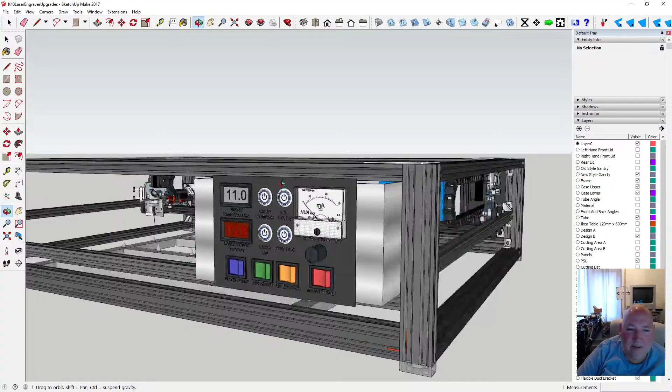What are we going to do with the something else? Yes, also went ahead and put some angle brackets here so I could move the whole thing forward to clear the wiring sticking out. So I put two angle brackets, I mounted it, and it needs to have a cover over the top or something.

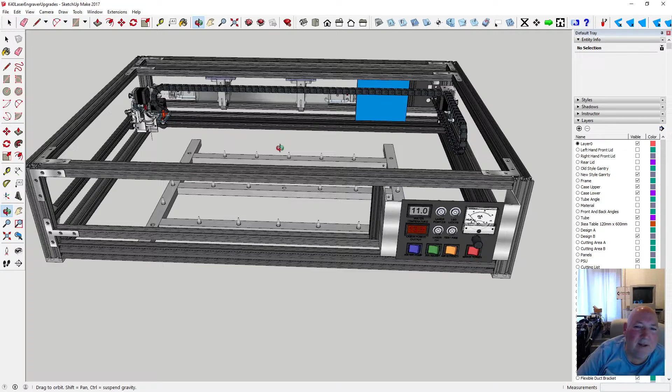Okay, sort it out. It's not like a CNC router. My CNC router, it starts limits from left front. It goes up - the bed is longer going up than it is across. But with a CNC router, it doesn't really matter where you start from. But it matters on a laser because you need to be homed, really.

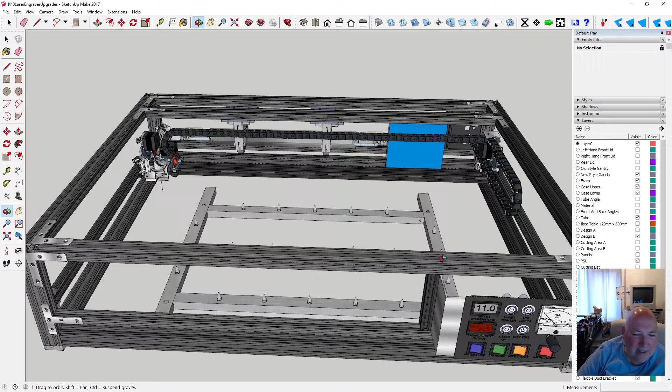You need to be homed nearest where the mirrors are closest together, because that's where you get the most accuracy. So if you want to be all the way over here, cutting a panel, just a small panel, that mirror is going to be right up here, this one's going to be right over there. Any tiny margin of error will be exaggerated over this end.

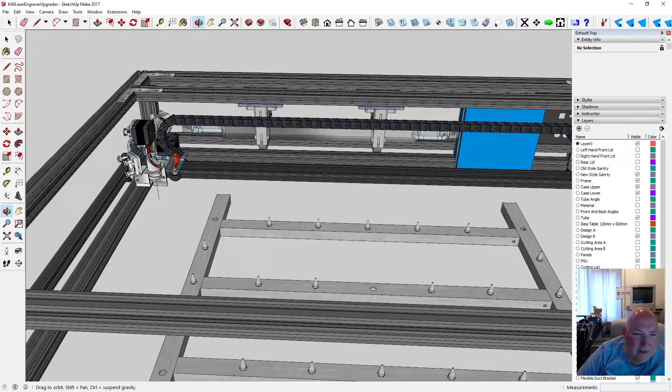So it makes sense to cut it over this end. Now the problem is, when you're on your LaserGRBL software, or LightBurn - don't know about LightBurn yet, got it working with LaserGRBL at the minute - you're wanting to cut from here, but your XY is there and it wants to move forward to go up the screen, and it wants to go to the right to go across the screen. No, it wants to go the other way, sorry, it wants to go right. Imagine this is turned around, it's almost like this is the front. So to cut it, that's your homing position, when I'm used to being homed over here, really.

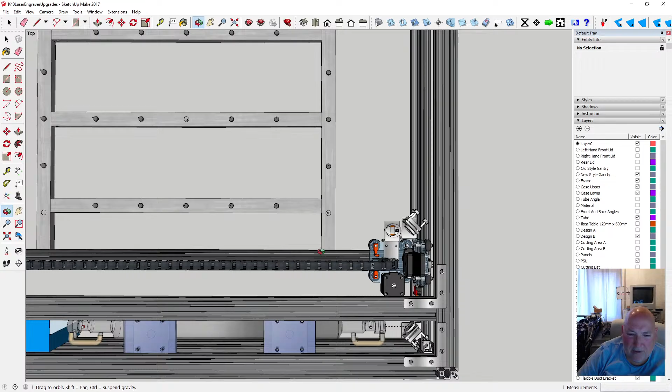But like I say, you don't want to be homed where your mirrors are spread apart, you want them close together. So if I want to cut an item that's about that big, the area I'm cutting, if I start there, it's going to go up, and then as soon as it tries to go across, it's going to hit the home limit. So you've got to first travel, you've got your machine coordinates of home, and then you've got your work material start coordinates.

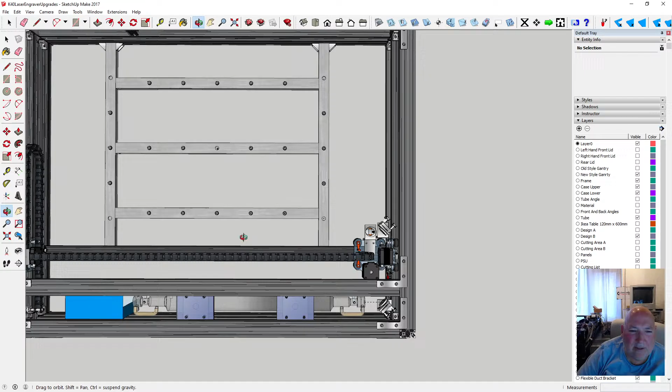So you need to offset it wherever you want. Ideally, you'd place it so the furthest most right part of your cutting area wants to be sort of down here. So you wouldn't put it over here, and you wouldn't cut it over there. You could cut it over there, depends how accurate you're going to be, but no matter how good you align it up, the further away you get, the more margin for error.

Anyway, I was having stall conditions and all sorts on the real thing here, but that's before I changed any of the settings in the GRBL settings. So I sorted it all out. I did lubricate the wheels as well, don't know if that made much of a difference, and the drag chain, lubricated it, and I've turned it round now because I was about to do some more wiring, but we can turn it back again, and run up the software, and I can show you running a piece.

The laser at the minute is not lined up. It's not going to be cutting with the laser, it's just going to be making the motion.

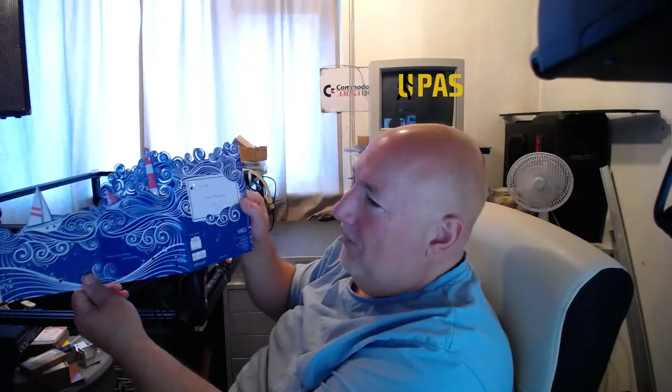Alright, oh, there you go, Father's Day card off the daughter, very nice. Marks and Spencer's. That's Father's Day today. And some of the money the daughter gave me for Father's Day has gone over to pay for my industrial chiller. I'll put that somewhere for a bit.

Right, let's get this great big thing round. Let's try and turn it round so we can see it from the front.

So we've got power, we're going to need the lead. Yeah, it's still got all sorts of stuff balancing on it, hasn't it? That's it, it's not going to fire up, so let's get a laptop on the go. I've dropped this laptop twice now because I've had it teetering on here, and twice I've knocked it, swung my chair around, knocked this, and it's dropped on the floor twice. Still survived though.

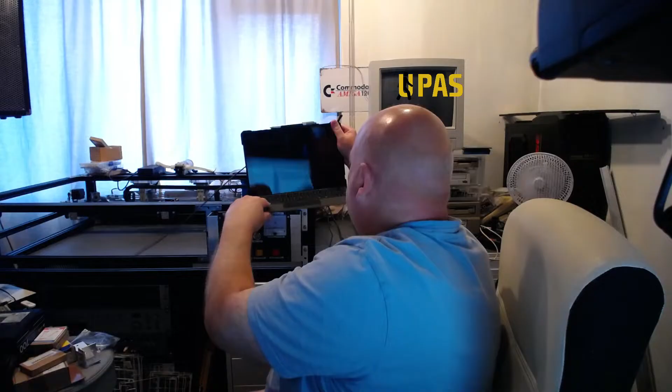Right, let's get this open. Okay, let's go like that. Yeah, it's up teetering. So we can't see that, so let's put it somewhere else. Anyway, it should be charged up, so I'll just unplug the charge lead. That's better. Right, so let's switch him on.

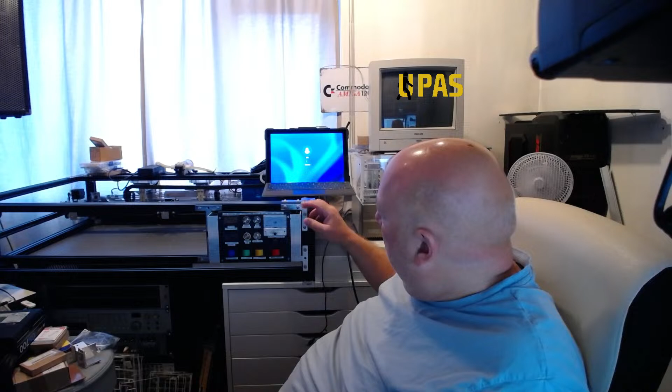So I'm going to have to make some covers for this. I've just got it fastened for now, but I'm going to have to put a cover over the top. I've lined it flush there, this one sticks out a bit. I've got to get maybe a bit of plastic, opaque plastic, to put over there in the bottom.

Alright, so we're going to have an extra switch now. There's no water pump anymore, just the air extract and air assist, but there's no water pump. So what I might do with that, I might put it to override. I'll have to change it then. Anyway, let's plug in.

Let's switch him on. No, I've got to switch on over here first. Now switch on. So we're on.

Run the LaserGRBL. I'm just using LaserGRBL for now. I'm going to set it up for both, but I was just doing it this way. It's got bigger controls for testing and stuff.

Alright, let's connect to it. So we're connected, load a G-code file. Right, so this is basically the front panel. This is G-code from the CNC router, but I've told it it's laser as well. I've redone it and sped up the speed and all sorts. So now that should cut from where it is at the minute.

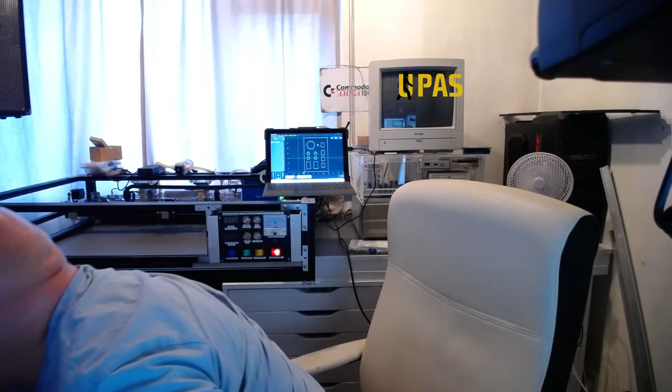You can't see it, so what I'll do is I'll get a camera on the go. Plug a camera in as well, get you a bit closer. Right, let's get you a bit closer.

Let's get this camera on the go. Hello, camera. Right, you'll go blank for a bit. Hang on, roaming cam. Just got to deactivate and activate it. Hello. Right.

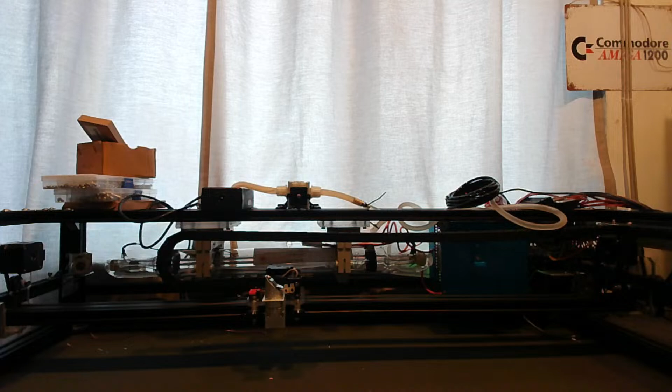So actually, I might be able to put that on there. Yeah, might be able to put it on there like that. What's that like? Yeah, that's alright, isn't it? Well, you can't see that, can you? Hang on. Oh yes, you can, but you can't see me. That's okay, does it matter if you can't see me? I don't think so, no. Anyway, you could do with seeing me, but anyway.

I wonder if I can put... nah, I'll leave that. Right, so I'm going to run it up now. Here we go. Here goes nothing.

It's counting down. Oh, doesn't like something. Detected some problem with your board. Machine alarm. Right, so I've got to do a reset.

And unlock it. Let's try and move it forward. Oh, it's moving forward and it's moving. No. I think it's... tell you what I'll do, I'll home the limits.

Ready? Let's home the limits. Let's home the limits. So it's homed one. It'll do its little juggle in a minute. It'll juggle it, it'll hit the other limit, and then it'll come forward a bit. November 3 Charlie Oscar Juliet.

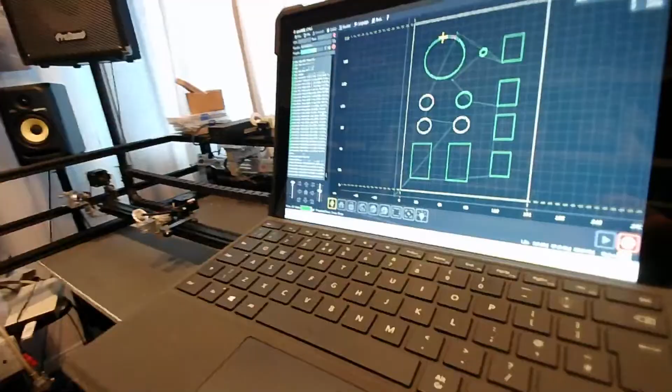Let's zoom in again. Like that if I go on one of these. Oops. Got it on there. Oh, there's a better angle. You can see it moving while the thing's moving.

Okay, very good. Transmission is okay, no problem. Modulation is okay, the signal is okay, except for that gap between transmitter and receiver. That's annoying, so you need to fix that. But anyway, good modulation. So the air assist isn't on yet, not the laser. That's 4 Echo Mike 7 in trace.

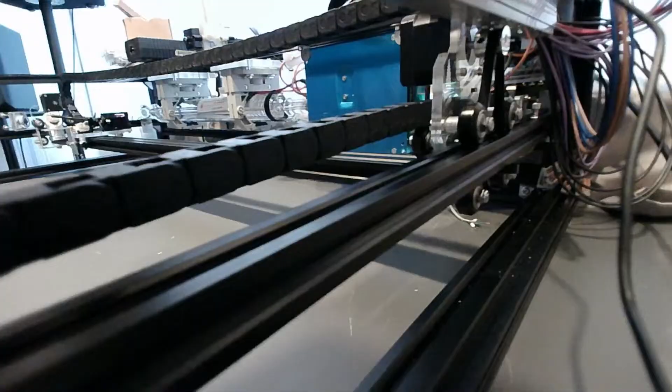It's all in reverse, though. Just the way it is. You've got to translate that, what you're doing on the screen, to around the back of it. So if you're around the back of it looking down...

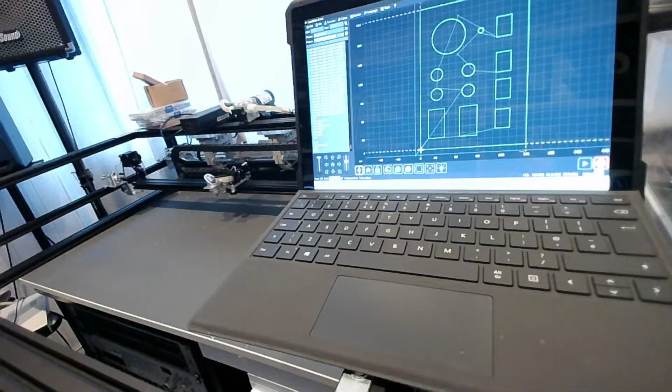That's finished. Right, anyway, let's get rid of shaky cam. Get rid of shaky cam.

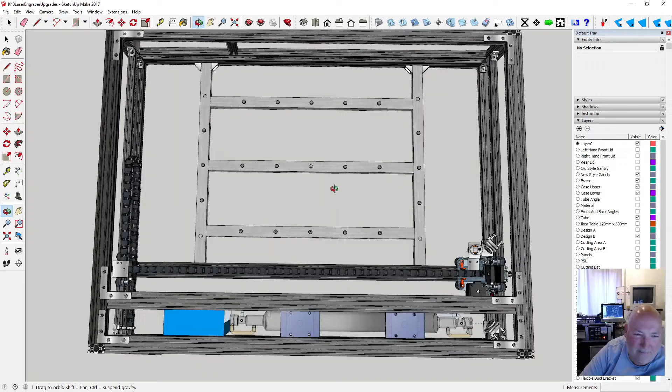Alright then, anyway, yeah, it's all mad, isn't it? Mad. Right, anyway, so the reason it was jamming up before is because I hadn't got the steps per millimetre right, and it was trying to shoot off super fast, so I slowed it down. For my scenario, I guess it's going to cut that slow anyway, so I don't really care.

I'll just home it from where it is now. Here, I'm just going to home it. I'll click on the homing, and here we home it. Ready?

There you go. So it's quite slow, isn't it? I think it's because I've got the manual holding. I don't know, but like I say, it'll probably need to be that slow to cut through the plastic anyway, so I don't really care. I don't want any fast jolting around, I don't need it. But if it's laser engraving, that'll be a different story.

Yeah, so it works alright. Oh, you can jog it as well. Yeah, let's jog it. The jog speed's right up. You go higher. No, let's do...

Alright, so let's... you can do something like this. We can bring it all the way over.

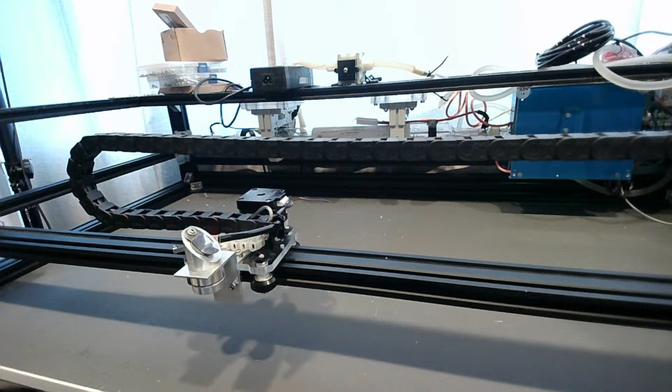So we've got to fit the air assist yet.

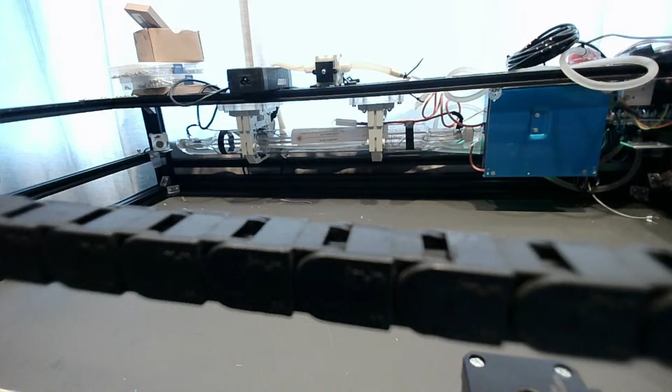Oh, it's actually stalled there. Right, I'll home it now, ready? We'll home it back again. Yeah, it's alright. Nice and smooth. It's on a 1/32 step, whatever that is. So it's nice and smooth with not too much juddering and jumping.

So anyway, I was just thinking I've got to get the laser set up next. Got the CW. Yeah, got the CW. Alright, so we've got they got this laser, yeah, I forgot what they call it now.

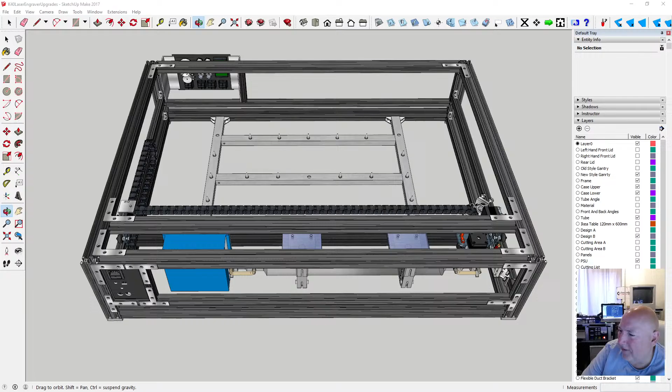So we've got, I picked one of these up, quite big, works well. That's the same kind of model. They're about 500-600 quid in the UK, but it's all smashed, but it all works. It's been dropped and banged and all sorts.

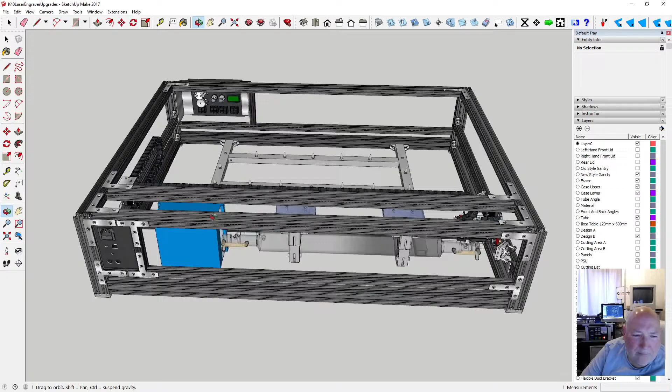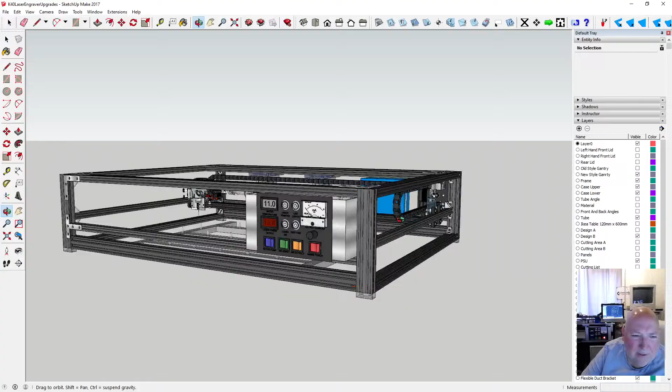So anyway, I picked that up, so I can eliminate the... don't need a water pump anymore. I don't need a reservoir, and I probably don't need a physical thing to watch the water spinning. It's got alarms on it and everything. You even get a normally closed or normally open output on the back. You can wire it to an input or a door switch. So if it goes into alarm, it'll switch it off.

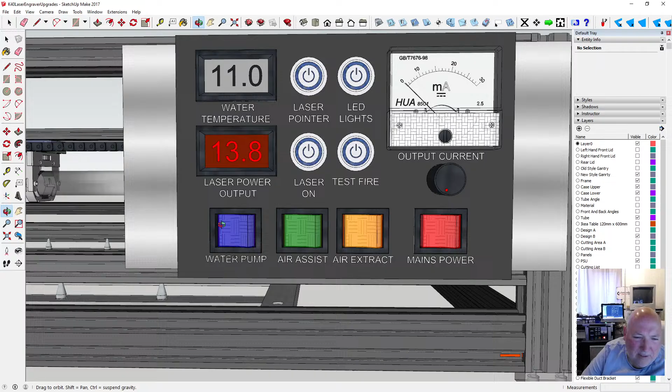So begs the question: what are we going to do with... what are we going to do with the water pump switch? Now I could wire it up to switch the water, well, it won't be water pump, it'll be chiller. So air assist, air extract.

So, laser on, test fire. I found out the test fire has to go to your power supply inputs - K plus and K minus, K minus and K plus.

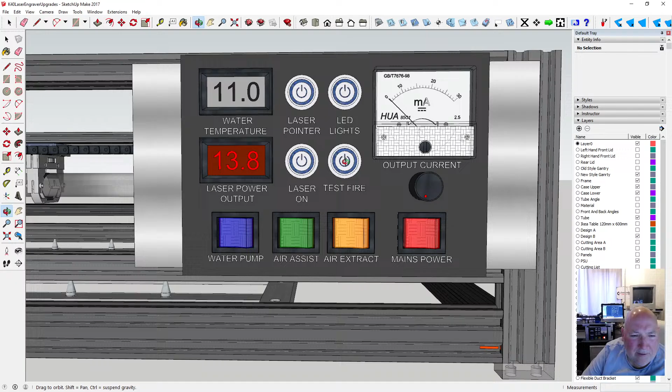So what you can do is use a changeover switch - that test fire is a changeover switch. These are just push to make, push to break, push to make - common, normally open, and normally closed.

So you could wire it to go into manual, where you disconnect your pulse width modulation power control from your PCB, your mini Gerbil or whatever you're using, and then when you switch over, you can bring in the pot that goes to the input on the power supply. Then you can have manual control, so if you want to override the G-code's power rate setting, rather than go back and modify your G-code, you could just switch it over into manual and turn this knob.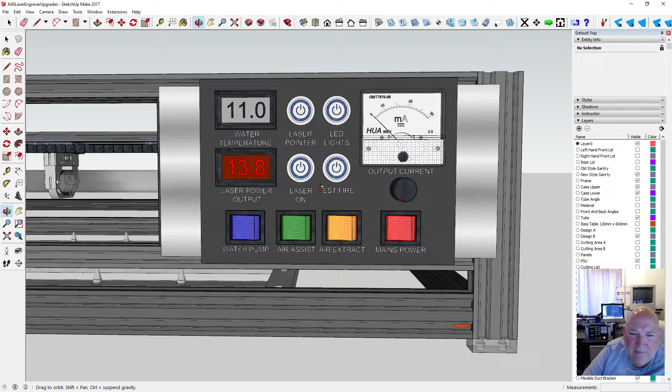So the only thing is these are only two single pole changeover, it's no good. You need a switch that's DC rated, since it's mains rated for the neon. You probably won't need to see it lit up, but you can remember which position it's in. So there is that - you can have it controlled from the software or controlled yourself.

Obviously, if that's going that slow and it's burning straight through, you can turn the power down, or if it needs to turn the power up, you can do that.

So I was going to strap the water pump on top somewhere and have a reservoir. Then I'd have got that great big encapsulated power supply that would have had to be bolted in somewhere, so I don't have to do all that now.

And I didn't want to buy a CW3000 because it just cools to ambient temperature in the room. I wanted to chill it down to 11 or 18 - some people say 18, I've heard 11. Probably 18's okay, I don't know.

I've got limits on, the limits are working. Test fire, I haven't wired that up yet. Laser is wired up, but it's switched off, so we don't get any laser going on. Air assist, we haven't got that on yet.

I've got some pneumatic pipe, thinner pipe, but I haven't brought it back yet. So I don't know whether to take the thick pipe out, which is water, probably irrigation pipe, and put the pneumatic pipe in instead. Probably will, because it bends a lot easier.

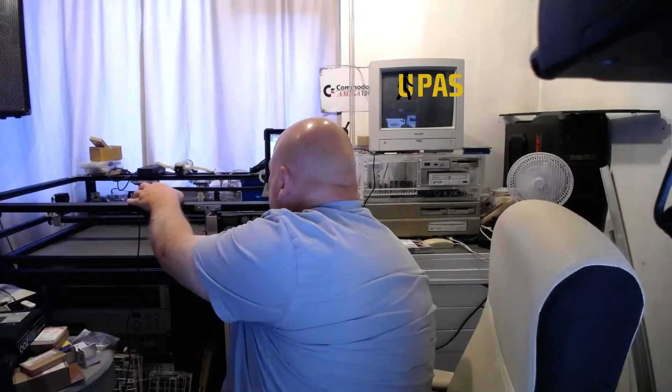Let's put it onto the roaming cam. Might as well let that run in the background. So that's basically, you could cut there. So it's running.

Alright, it's running okay. Now if you was doing engraving, you want it fast. Now I've set in the G-code something like 4,000 something, but it must have exceeded, and I'm gonna have to look into that - look into it a bit to find out how to speed it up.

It is a bit slow, but like I say, if I alter the steps per millimeter - $100 and $101 are set to 80 at the minute - I put a ruler on top of the gantry, and it's about right. If I move it 100 mil, it's about 100 mil it moves.

If I put it on 157 for $100 and $101, it moves quicker, but it travels twice the distance. So I don't quite know what I'm doing, but anyway, I've got it in a position where it can be used.

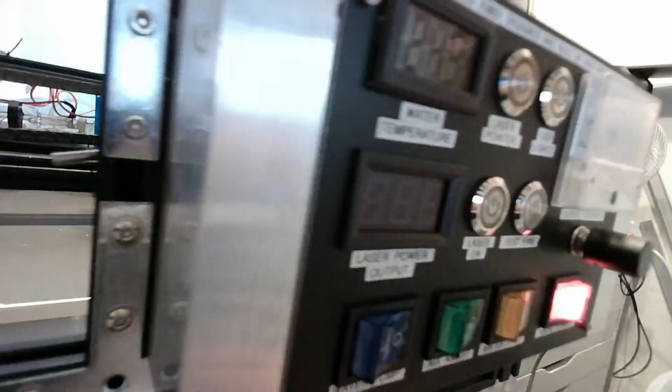Right, so you've got a close up of this. I've just basically got some aluminium and clamped it in either side, trying to make a box out of it. I've got to do the lid and the top yet, but the wiring is somewhat clear, so it's got a bit of mains stuff going on here.

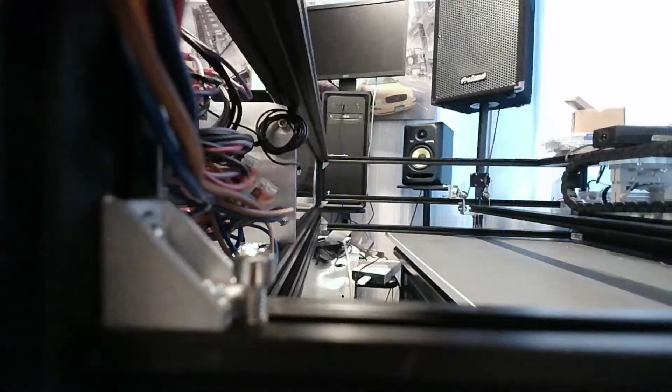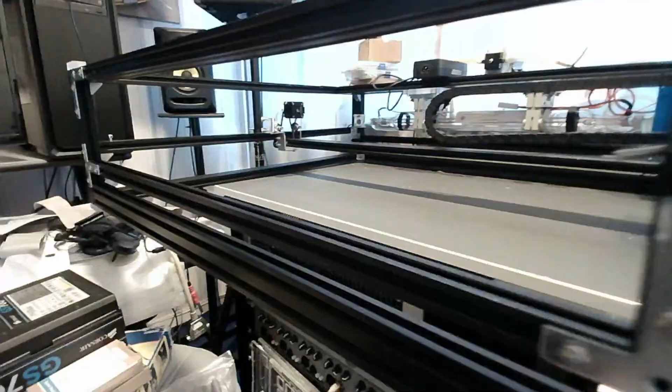So if I bring the gantry, if I just keep bringing it over here, it'll come all the way up. It's quite a huge area. I've set the soft limits as well.

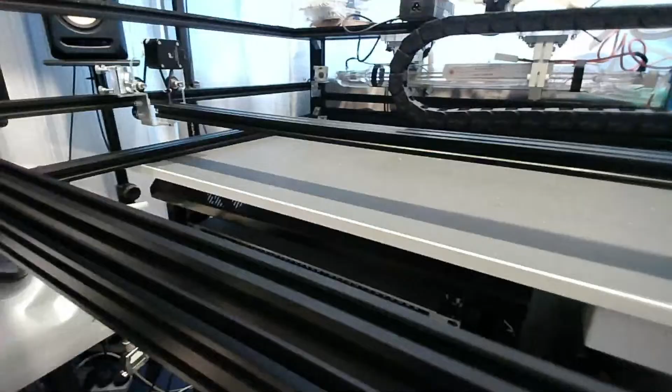Right, I'll just set it to go to home anyway. There you go, put it onto home. It's running alright, it's running around.

Yes, there's some more tweaks to do, but finish wiring, there's all sorts to do. But the homing, I think, on my CNC, you home it once, and then when you close the program, it remembers where it left off. With this, it seems to forget that, so I don't quite know why. It's a different lot going on.

There's a hole in the curtain over there. Well, see that hole in the curtain? That's where the laser fired up all on its own. Burnt the curtain. Yeah, right there.

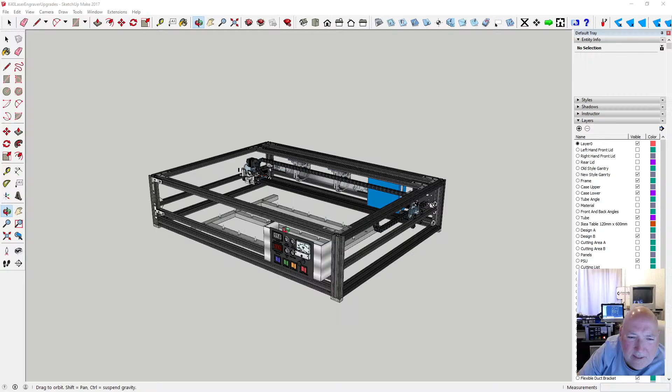Right, okay. Alright then. Anyway, so like I say, I've got to put some covers over there and underneath. I might even put a piece of plastic in here, and a cut out just for the wires to come through there. And I haven't modelled the trunk in yet, so I've got to model the trunk in and the control panel.

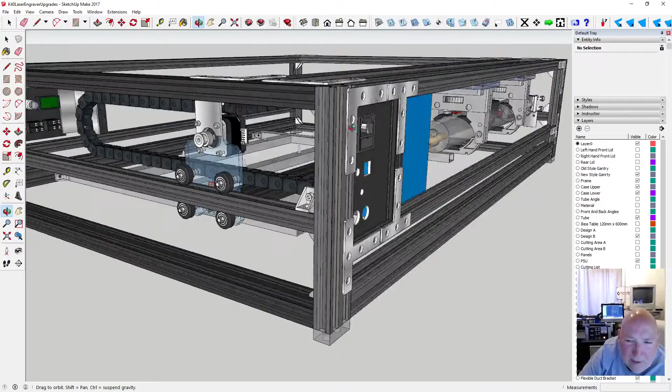Laser tube seems to work okay. So yeah, it's doing alright. So it's got to align the mirrors. So what is the next thing? Finish wiring it up, trim the wires.

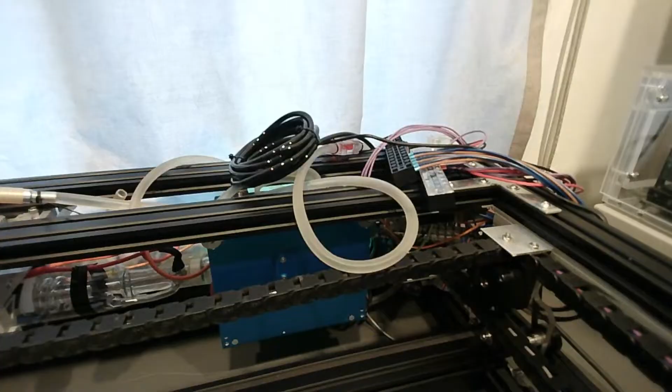Finish all the wires off because they're just hanging there like that at the minute. There you go, yeah, they're just hanging there like that. So I've got to trim them all, fasten those connectors in place, all those connectors somewhere.

But I don't need the power supply now or the water pump. So then it can concentrate. The first job it's got is to cut its own panels. They're running here with the doors. That's the first job it's got to do.

Alright then, so anyway, that is really it. I've got the industrial water chiller I wanted for cheap, very cheap. Works okay, I've tested it, it's all smashed up. Once the cover's taken off and straightening all the bits, looks like it's been in the back of a van or something, damaged in transit. But anyway, it still works, it'll do the trick. Luckily enough for me.

That's it really, I ain't got no more. I modified my chop saw so I could get the 80mm material in, just about got it in. Managed to chop these two pieces in it, so I was lucky. Just managed to get it.

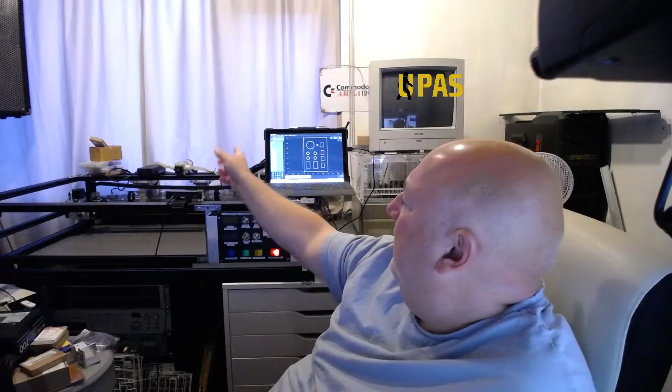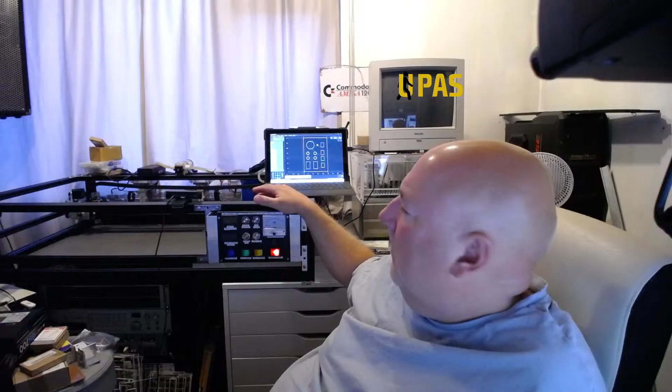Anyway, I've sorted a few problems out, so I can take the pump off and that power supply, put it away. That pump's actually off my CNC. And this probably is going to go down next to the CNC. And I was wondering, that's got a spindle that's water cooled as well, which I don't really use, but potentially that cooler could run through both systems. It could basically run through both, but probably won't do that, so I don't really use the water cooling on it.

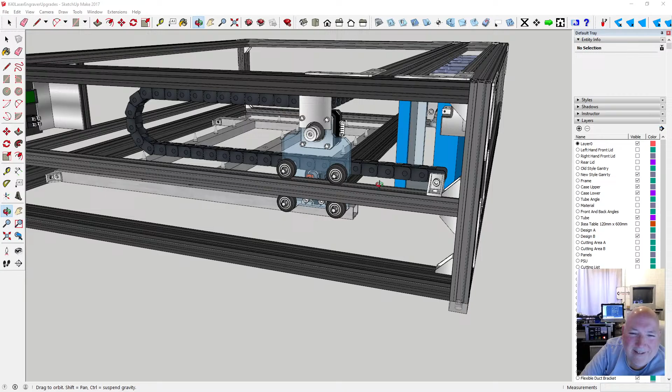Okay, anyway, yeah, that's all I've got really for today. I'm very tired, so yeah. But I spent all day yesterday with ChatGPT trying to get all the settings homed in. No pun intended. And we decided, yes, so really what you're seeing it from the back. With the software, you're seeing it from the back.

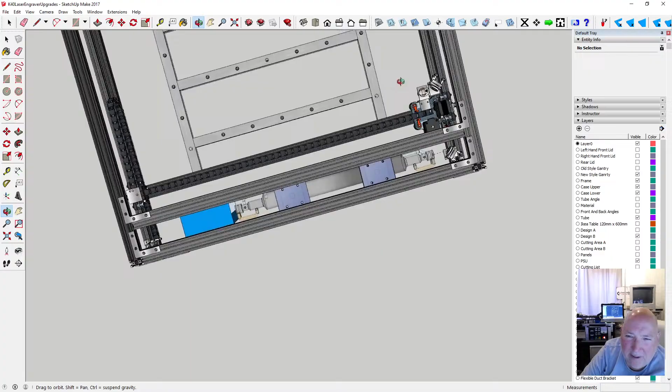When it wants to cut, you can't start from there because it wants to go that way. You've got to give yourself some clearance, whatever the width of the part, and then do it. So you've got to take that into account. Whether you always have to do that, I don't know, unless you cut it in reverse then turn the piece over. You could do it, but then your screen would be showing a rectangle cutting that way, while this thing would want to cut this way.

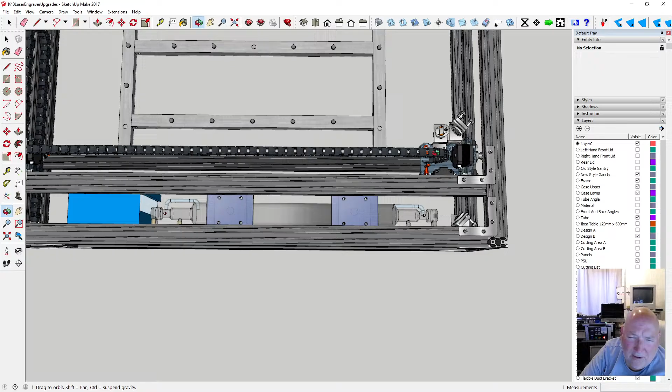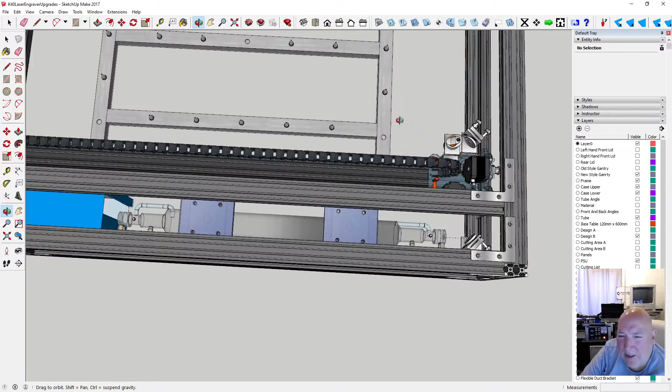I want to be able to CNC. If I use anodized aluminium, I want to mill it out, but before that I want to use the same code to laser engrave the text on it. Then transfer it over to the CNC to cut any parts out, holes for switches and things. So I've got to make these two, this Chinese CNC 6040 and this custom K40 inspired thing.

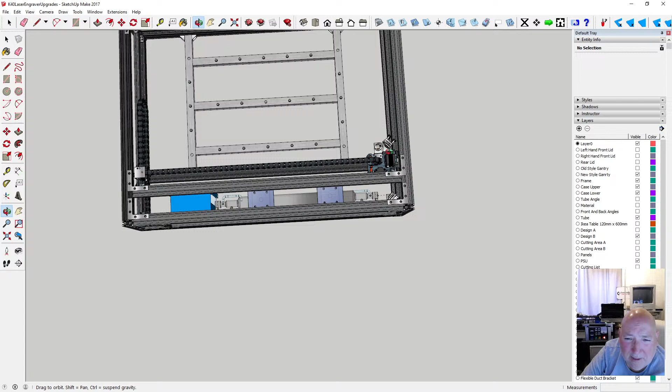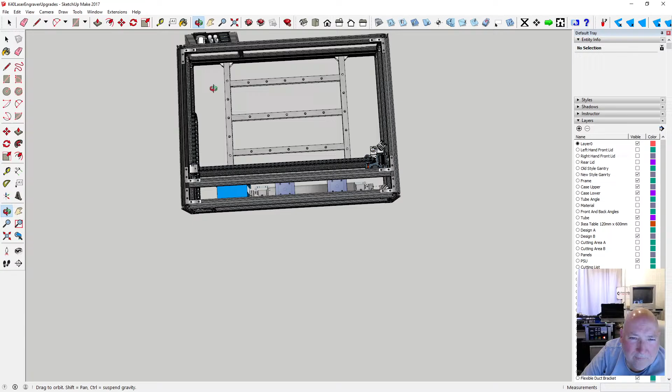Now you can change it, but probably you don't want to be cutting by default up here, away with all the mirrors stretched out. You want to be cutting for your accuracy down here. Yes, it should theoretically be possible to cut it all, or maybe it doesn't matter, it depends on your alignment. Obviously there'll be some loss over here, a bit of loss of power maybe, I don't know. We'll see, depends how good the mirrors are.

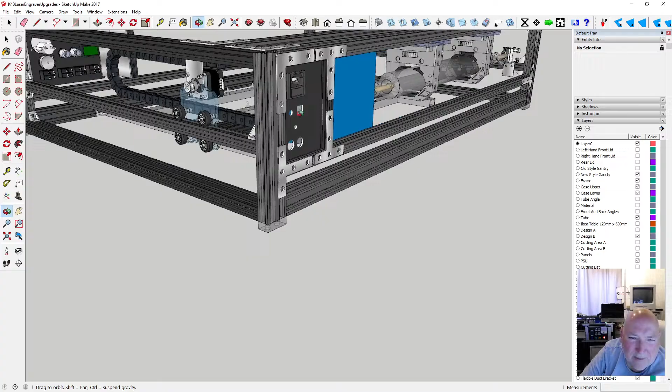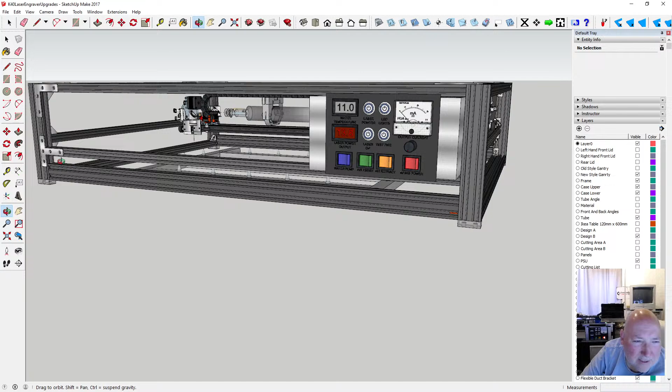And this panel, I might do the same as I've done over here, fetch that out like that. This idea of putting it in the groove but loose is a bad idea, because when you plug in and connect it's trying to move with it. So I'd probably bring that out onto some brackets just to cover it up. Not too far though, just enough, because I want to be able to push this flush. But having said that, you've got your front pass through and your rear pass through, so you need some space to be able to push it through the rear.

Anyway, I think that's it. What have I been going, 46 minutes? I can't think of anything else at the minute.

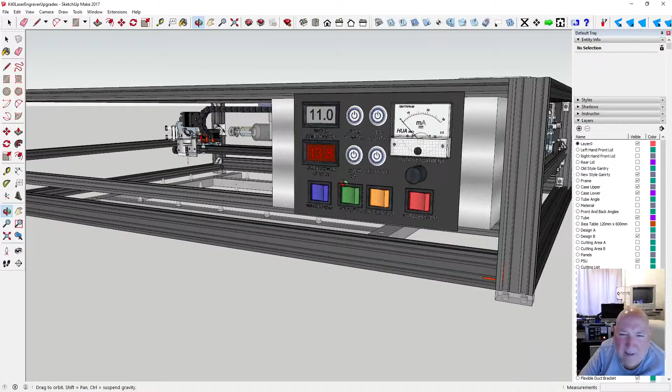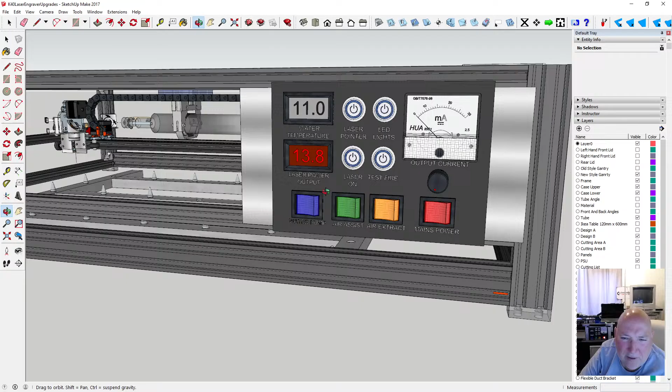So I'll need to get the test fire wired up, and decide what I'm going to do about this water pump, whether that switches the chiller on or not. It's quite a powerful thing, the chiller, you don't really want to switch it through a small 1 mil panel wire. You don't want to be doing that really.

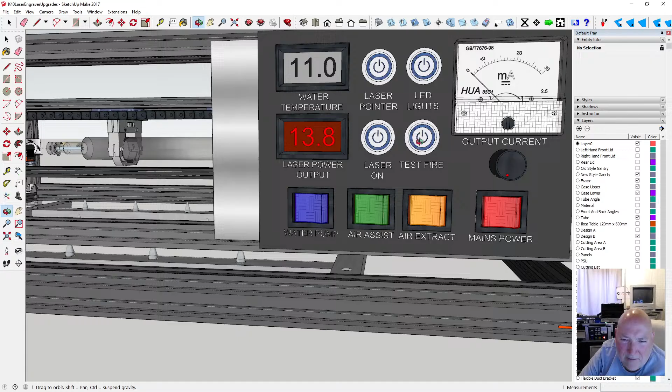But I think we need to. The test fire doesn't need that kind of switch, so whether I can swap this out. Yeah, oh, there's all the wiring for the LEDs to wire as well.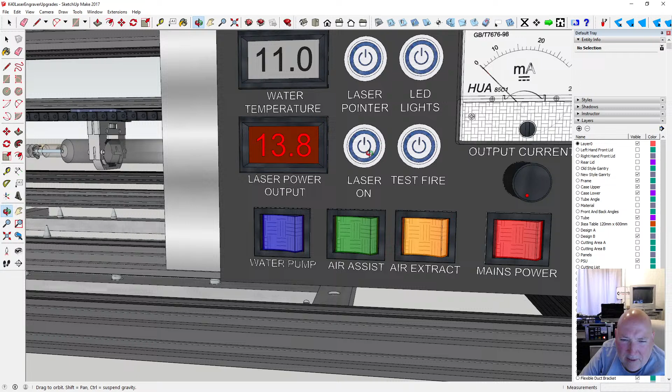So laser on, obviously you'll need to put one side of the LED to plus - actually it's test fire that did that, didn't it. So laser on, when you've got it in, it just needs to light it up. You might need a relay for that then, if that's just a single pole connection. Probably need to activate a relay, so there might need to be a few relays on a board somewhere.

Unless one of the outputs can switch an LED on to say laser on - it should be able to, because an LED lights up when the laser's on. It holds the power supply L - not the L, is it - the laser enable, or LO, laser output, holds it low. So as long as you put your plus... no, you want that one to light up whenever it outputs the laser, but when you switch this on to enable the laser, I mean you can see it's indented, but you've got an LED on it, you might as well light it up to say. So you'd have to basically use... don't know how you do it really.

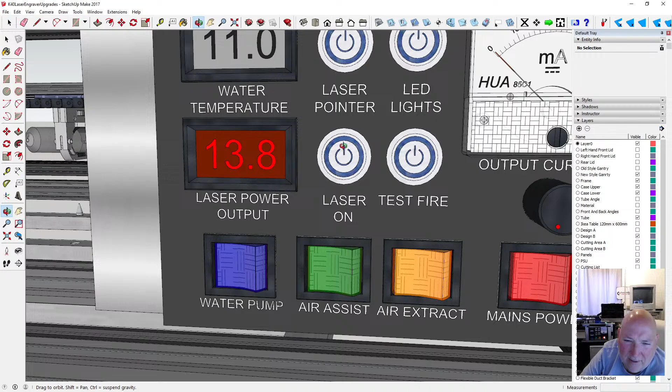Because laser on, it's laser enable, not laser on. You're not putting the laser on, you're allowing the software to switch it on. This doesn't switch the laser on. So yeah, there's different ways of wiring it, a lot of different ways of wiring it. So I've wired it to connect the laser LO, or laser output. It connects the pin through to the mini Gerbil, signal to say switch, telling the power supply to switch the laser on. So with that out, it's telling it to switch it on, but the connection's not getting to the power supply because I've broken the connection basically. Only when it's in is it made.

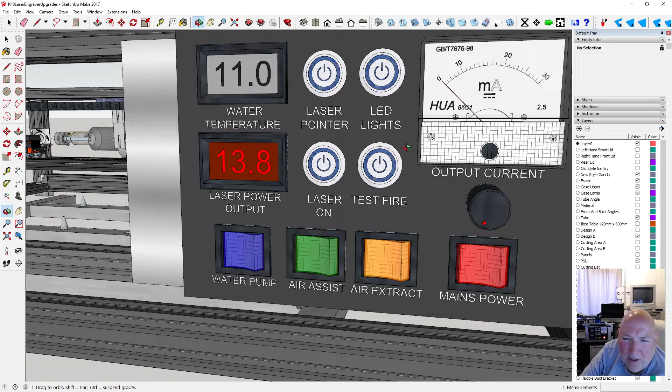If you're going to operate an LED from it, like test fire, every time the mini Gerbil switches on the laser enable to the power supply - which basically says switch on the laser when it drags it low - that LED can work off that signal, but you'll need a diode and a transistor so you're not drawing the switch away.

I'm not sure, I'll have a look at it, but you could put a BC337 or similar NPN transistor, wire the collector to 5 volts or 12 volts, whatever it needs to be, with the base signal through a resistor fed from the test fire. We'll have to have a look at it.

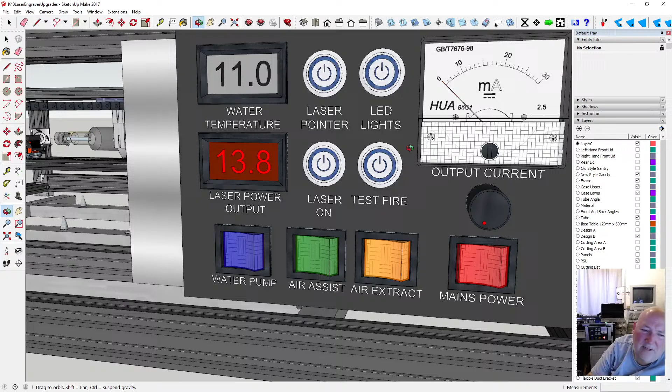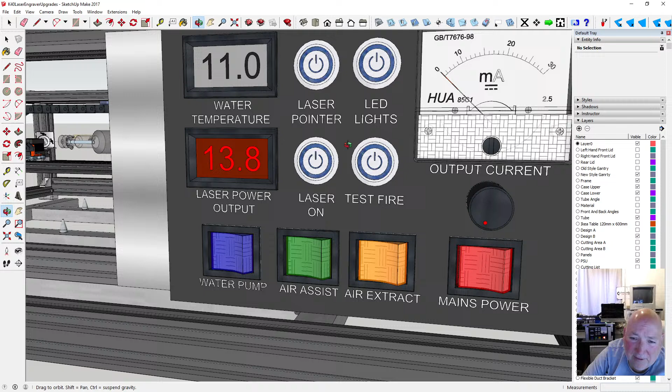There's so many different ways of doing it. We'll have to try and find out what's the best practice for it. But ultimately, if you wanted to, you could use these to switch relays - some with 2-pole or even 4-pole changeover - and then hardwire everything you want without overloading some of the outputs. So anyway, there's a bit of juggling around to do.

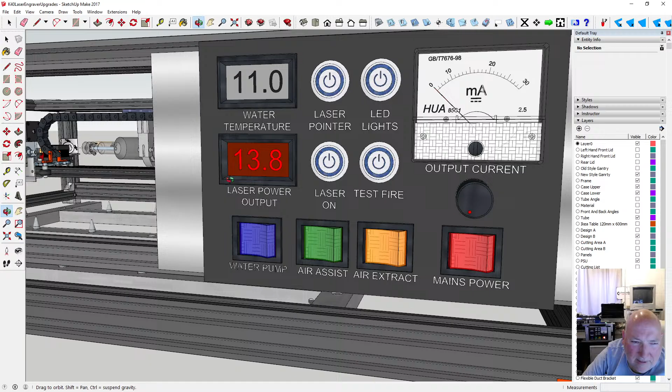Be nice to control the milliamps from this. So that's your direct cathode laser output in milliamps, and you've got your pulse width modulation here. Oh yeah, so you'd have to feed that. Yeah, there's so much to it. Just have to do it bit by bit, really, get there in the end.

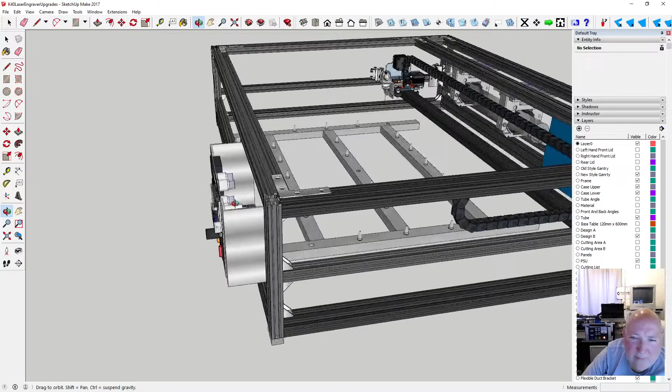So at some point they've got to create some G-code for some plastic covers for this, and the bit there to stop - just to keep it sealed from the smoke, basically. And this will have to make its own covers.

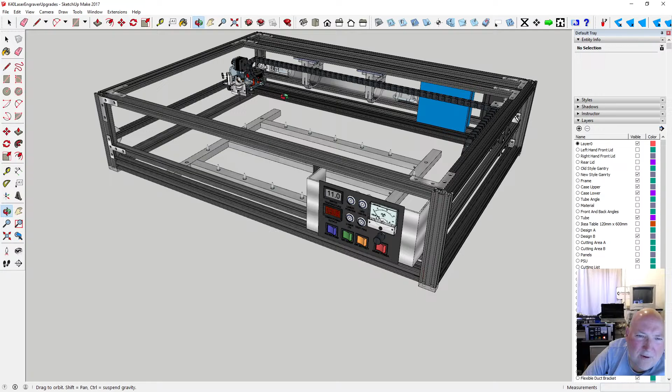We've got a lot to do. We've got progress, but we've got a lot to do. Managed to move it smoothly. It's moving slow though - it is slow, but it's moving the right distance. Gonna have to look at that a bit more in detail.

I've exhausted ChatGPT on the subject, so I'm going to have to watch a few more videos, see if anyone's got a similar problem. I've done nothing with this bed of nails yet.

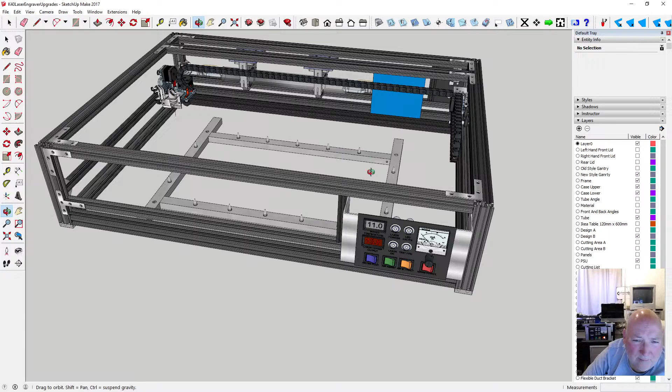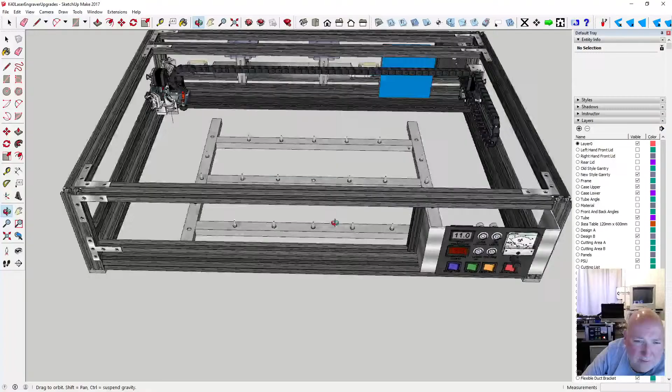That'll have to be CNC'd. Basically it's just there to provide - when I put the sheet of plastic through there and out there, it'll hold it there, but it'll sag just a bit, so these have to hold it upright. That's all it's for. And maybe if you're cutting something out, there's probably not enough there.

Right, anyway, I've got to go and do something, like watch TV for a bit. So I can't think of anything else for now.

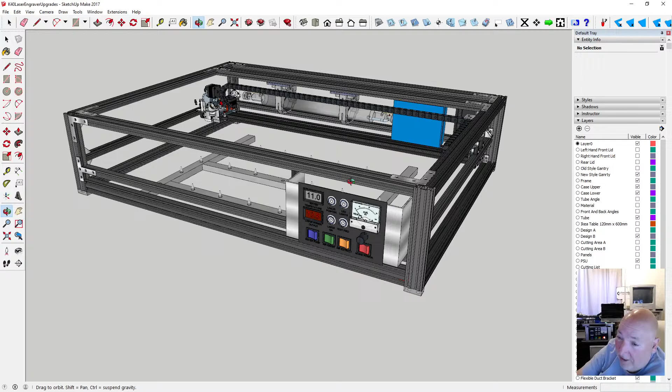So yeah, big part of the day was the industrial water chiller. Very lucky on that one. I had to travel about 40 miles each way to go and get it, but definitely worth getting for £70.